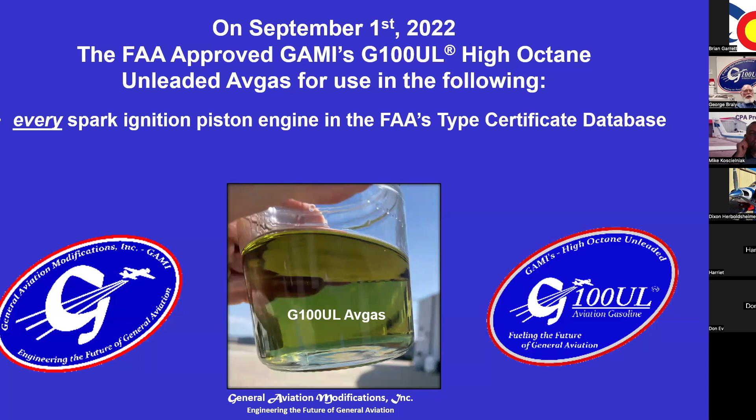On September 1st, 2022 - now nearly 4 years ago - the FAA approved GAMI's G100UL high octane unleaded avgas for use in every spark ignition piston engine in the FAA's type certificate database. And when I say every, I mean every single one of them, without any exceptions. Our instructions from the aircraft certification office are, if we happen to stumble on an oddball that got overlooked for some reason, that as a DER, I'm authorized to sign an 8110-3 and do a 337 to get it approved on a one-off basis. So every single spark ignition piston engine in the FAA's type certificate database, and in addition, every airplane in the type certificate database that uses any of those approved engines. That sounds an awful lot like a fleet approval.

We can discuss that a little later.

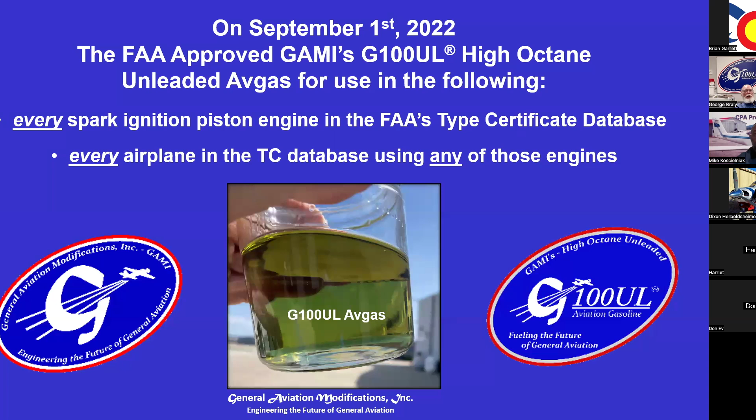The fuel is a drop-in fuel in all of those airplanes and engines. All you have to have is the STC, and you can have an airplane that's half full of 100 low lead, and you can go out there and dump this fuel in on top of it, and it's still legal to fly. The FBO can have a 10,000 gallon tank, burn it down to 1,500 or 2,000 gallons, and put in an order for the green stuff. And 3 or 4 days later, when the transport truck shows up with 7,500 gallons, what does he do with it? He does not have to clean the FBO tank. It's really simple - all he has to do is dump that 100 low lead in on top of this stuff.

I'd dump the G100UL in on top of the remaining 100 low lead, and change the logo on the tank so it says G100UL. That's all that has to be done. Does it have a little 100 low lead in it? Yes. Is it very little? Very little. By the time you've done that cycle 2 or 3 times, the amount of lead that's left is undetectable on standard testing.

And it greatly simplifies the transition and makes it really easy. That's important for Centennial and some of these other airports. Don't let somebody tell you we have to have new tanks or any of that kind of stuff. You don't - you can dump this stuff in on top of them.

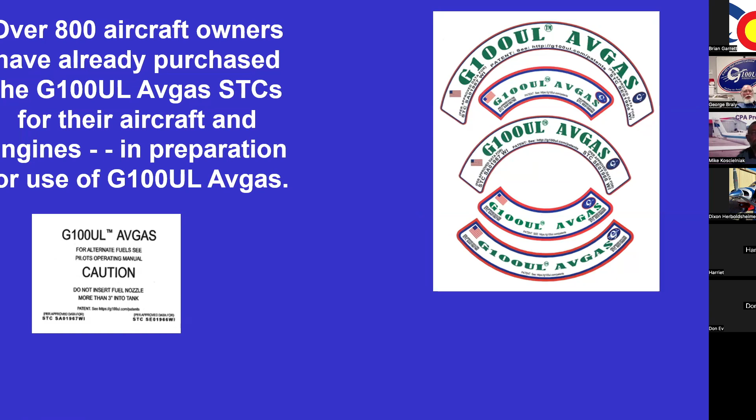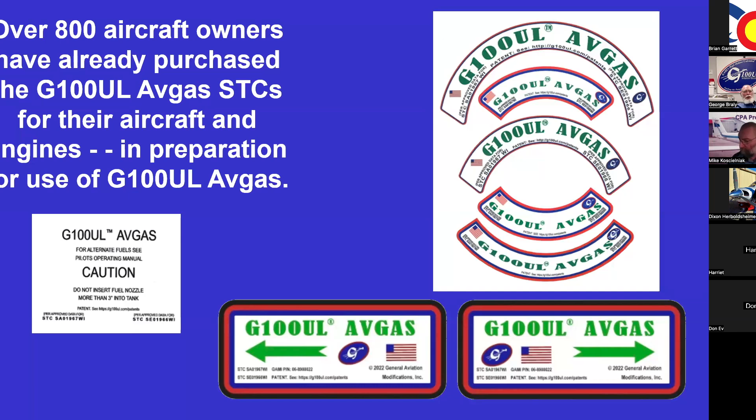Here's a simpler one that may be more useful for some people, and it's very similar to some of the ones presently in use. And then these were recently added to the array of placards because they're useful - you can take one and put it either inboard or outboard of the fuel filler port without having to match the diameter of the port, with the arrow pointing toward the filler, and it'll get the attention of the ground crew.

It has flown a few times. The crew doing the restoration on Saturdays kept hearing our engine run in the test cell, and they got curious and came up and got fascinated watching the computer screens with the different fuels we were running in our test stand over the last 6 months. A few weeks ago they came back to us and said, hey, we're getting ready to fly this airplane again - we want to drain the right-hand tank and put G100UL in and fly this airplane on your fuel.

Now those engines are R2800s, supercharged R2800s. In terms of detonation characteristics, they're potentially the most significantly severe engine that's ever been put on an airplane - a certified airplane or a certified military airplane.

So the fuel is in the airplane, and they're waiting - they lost their pilot and they're waiting on another pilot to show up to fly it. That's shortly underway. They've been running the engine on the field, doing ground runs and whatnot.

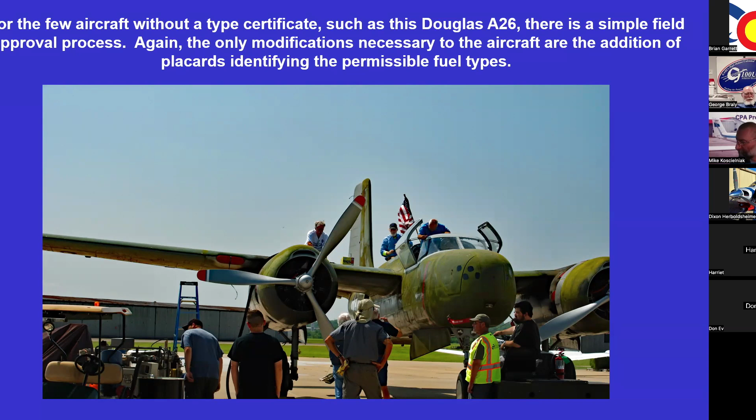If you'll notice the mid-wing construction and the engines hanging out on the wings like that, it's very similar to a much later designed airplane, which has a mid-wing and an engine on each wing, otherwise known as an Aerostar. The family resemblance goes back to the guy who designed this airplane, Ted Smith. He designed the entire line of Aero Commanders, then retired, moved back to California, and designed the Aerostar. I had the pleasure of working for Ted Smith as a junior engineer for three summers between my semesters at Brown University, so this airplane has a little nostalgia in it for me. Right now it's sitting there with 400 gallons of G100UL in the right-hand wing, waiting for a pilot to go fly.

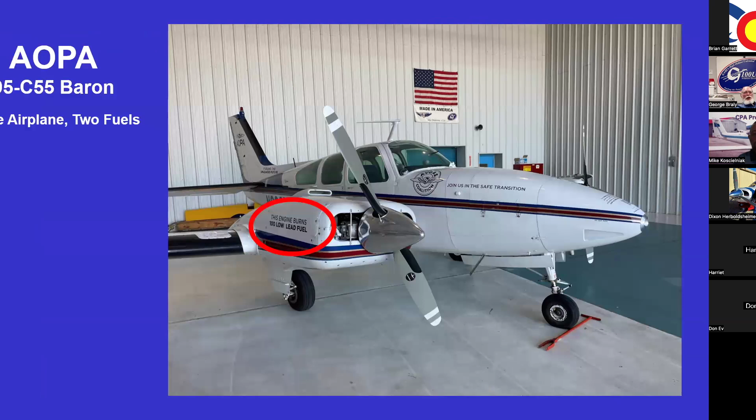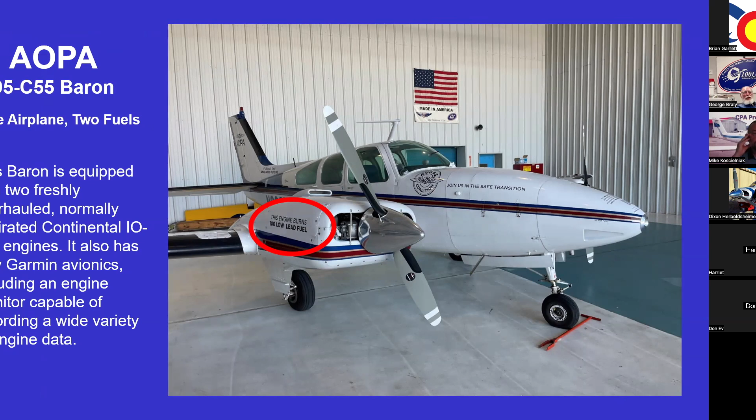So here was the AOPA Baron when it came to our hangar. The right wing had 100 low lead in it. It's equipped with 2 freshly overhauled, normally aspirated 520s. The only time on the engines was 3 or 4 hours return-to-service time in Frederick, Maryland, plus the ferry time out to Ada. Since then, the left-hand engine has had G100UL in it almost 100% of the time, and is now well past 200 hours time in service since last November. We've got a lot of very, very good data.

That is high quality data because you've got two identical engines, randomly selected to put the fuel in the left side or the right side. They've been operated by the same pilots - at least 8 or 10 different pilots have operated this airplane.

You may have seen some of the reports. I think Rick Durden came down and wrote a report on it. AOPA has written several reports. We've also been doing oil changes, sampling the oil, doing bore scope inspections, compression checks, and all that stuff.

So Mark Baker said - let's see here, I'm going to have to move this - Mark Baker says, Braly and GAMI have done a great deal of pioneering work preparing for the GA future, and they staged the AOPA Baron at our headquarters to try out the fuel. The move to unleaded fuels is absolutely critical to the future of general aviation, and this airplane is a valuable tool because it can help us make the transition confidently.

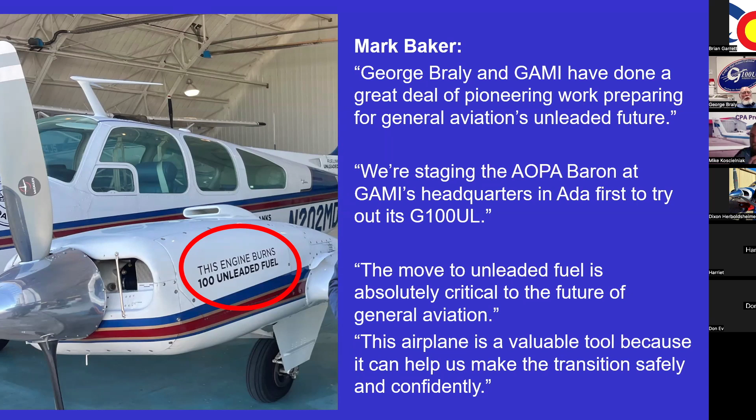And boy, he has been right about that. I will tell you I cannot say enough good about Mark Baker's perception and identification of issues for the future, and his leadership at AOPA that he has put into making this happen.

And there's the good Mr. Baker, and we're both grinning from ear to ear. He just got through, I think, flying the airplane on the fuel, and he was tickled pink with what he saw. A few weeks later, we went out to Buckeye, Arizona, and AOPA brought their plane out there.

We shipped some fuel out there. Interestingly, this airplane is the training Baron from California Aeronautical University in Bakersfield. The owner of the flight school flew it down there. We put the STCs on the airplane on the ramp with a flight standards inspector observing, and he got all through and said, boy, that paperwork, those placards, that's just perfect. Y'all have a good day, go fly. And we did.

The picture in the lower left is from inside our engine test cell here at GAMI, inside the Carl Goulet Memorial Engine Test Facility.

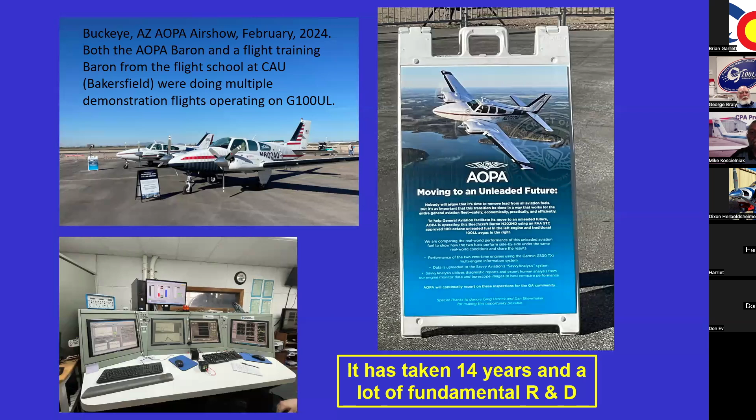It took 14 years and a lot of very fundamental research and development. Don't let somebody mislead you about that statement - that is not hyperbole. All the way back in 2010 and 2011, we started noticing problems with the way detonation testing was being conducted, and we started an intensive R&D effort that took us close to 24 months. But we figured out what everybody else had been doing wrong. The FAA ended up doing a full-blown issue paper, which is their highest level of approval of means and methods of compliance. As far as I know, we have the one and only detonation test methodology that has ever been approved by the highest level of the FAA certification and review process for approving means and methods of doing detonation testing. So that was part of the fundamental R&D picture.

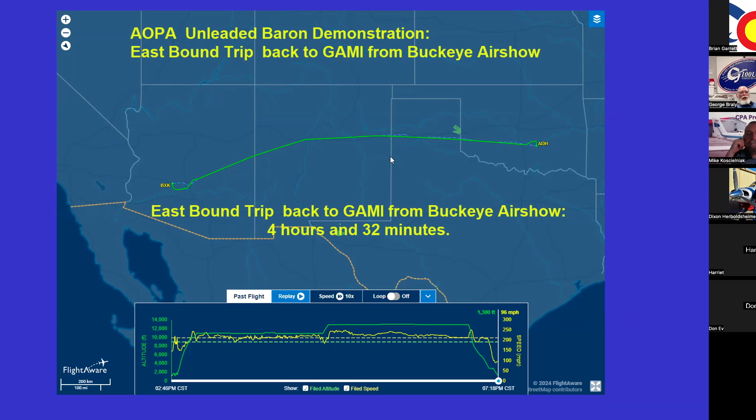There's the flight aware tracked on the trip home in 4 hours and 32 minutes. Nice trip, fun trip. So here's some interesting data from that Baron.

The screenshot on the left, we were cross feeding: the left engine was running off fuel in the right tank, and the right engine was running off fuel in the right tank. So they're both running on 100 low lead. If you look carefully, they're both at 25.4, 25.3 inches. You look over this one, and they're exactly the same, 25.4, 25.3. Look at the RPM: 2470, 2470, 2480, 2470. So the engine is set up in both of these pictures exactly the same.

We're in nice, smooth, still air. This engine's running at 14.5 gallons on each engine, lean of peak, using 100 low lead. And the true airspeed, if you look closely, is 187 knots.

Now, again, with the engine leaned to the same degree, or lean of peak minus about 3%, we now have 14.0 gallons an hour. And this airplane is doing 187 knots exactly. But the fuel flow, that is a misstatement right there.

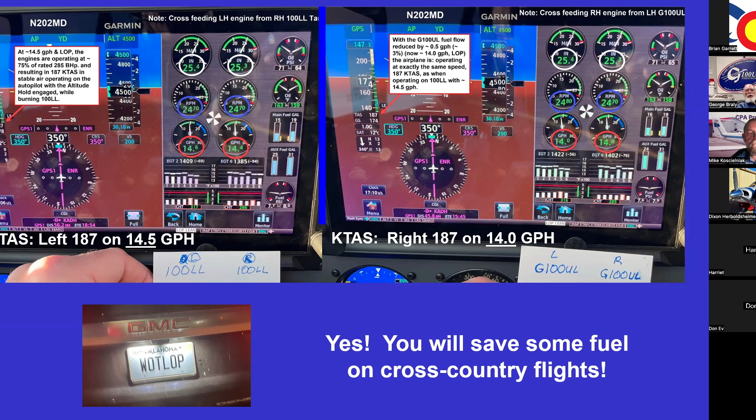How often do they get cleaned? The Commemorative Air Force tells me they clean the plugs in these big radials running 100 low lead approximately every 50 hours. And they have to, because the engines are run fairly rich and the spark plugs end up giving them all kinds of engine problems if they don't clean them prophylactically every 50 hours.

So keep that in mind as you look at this. Oh, by the way, how many man hours does it take to remove and replace the cowling on that A-26? I watched him do it one day. It took 3 men - actually 2 men and 1 woman - about 4 hours to remove the cowling, so they could then start in and remove the 36 spark plugs.

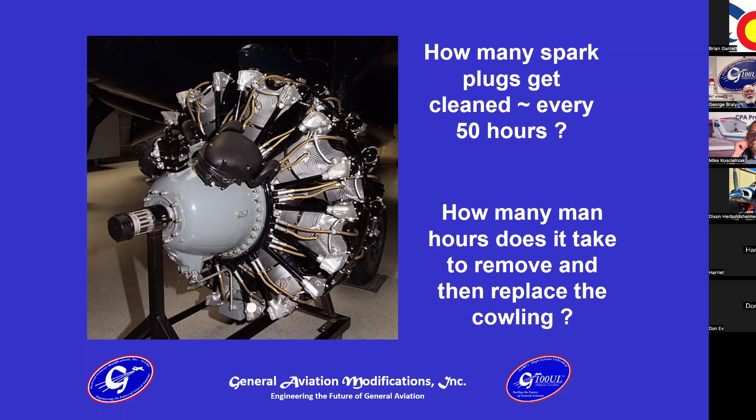And the CAF is now undertaking a program to authorize every single one of the 220 airplanes in the CAF fleet to operate on G100UL.

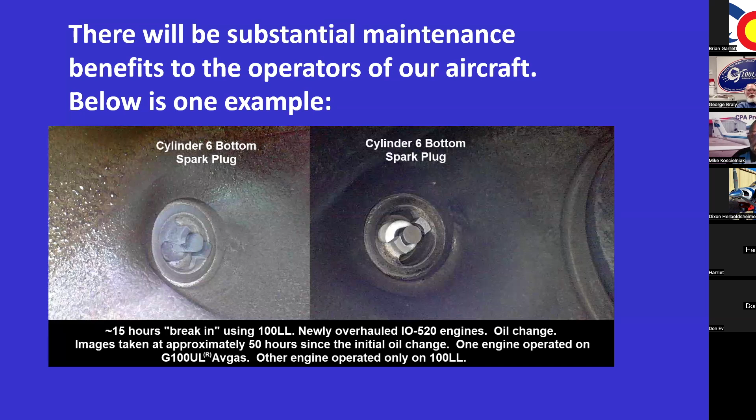This is after about 150 hours. I've looked at the data since then at 200 hours and it hadn't changed. What you see is that the wear metals for iron, chrome, copper and molybdenum are all down, and the wear metals for nickel are exactly the same. On average, they're down about 40%.

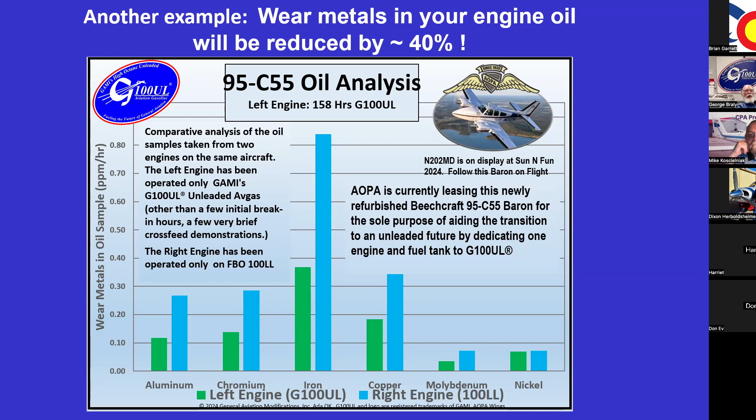Now that has some substantial implications for the future, because it's quite likely for airplanes that are consistently run on G100UL that we're going to get pretty much of an automatic TBO extension out of the FAA based on this data. We've already had those conversations, and they're asking us to collect a little more data and write them a report.

There's been a lot of noise and talk about the valve seat recession at the University of North Dakota running on 94 UL. Here's kind of how those things are measured. It has to be done very carefully to get it accurate, and it takes an actual fixture that has to be custom machined for each different type of cylinder head in order to get repeatable measurements.

The measurements we have done on the AOPA Baron have been done that way, and there's no detectable difference in the valve seat recession after a couple hundred hours between the left engine and the right engine. That is consistent with lots of research data from the FAA from 1989 and 1990, when they ran two identical engines, one on 100 low lead and one on 100 octane isooctane for 150 hours and tore the engines down. They got exactly the same results, no difference.

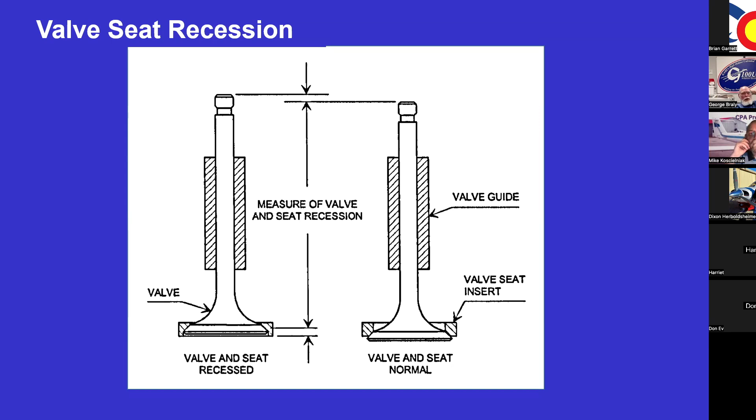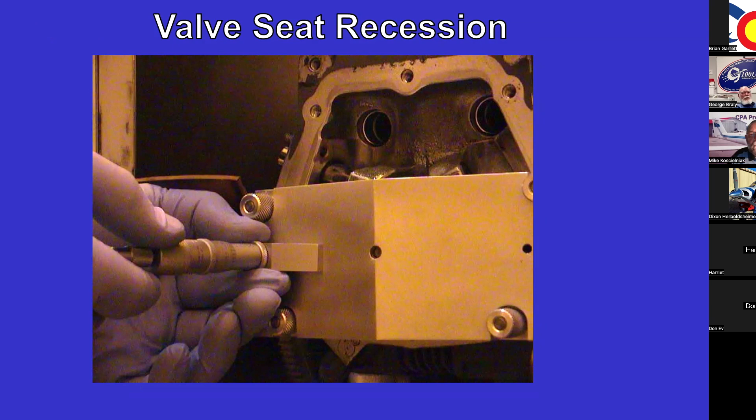So you ask your question, well how do they have this problem at UND, the University of North Dakota, after 300 or 400 hours on one or more of their airplanes out there? This is the fixture that has to be machined and fitted on the cylinder head in order to accurately measure the valve seat recession. And here is some of the data from the AOPA Baron at 150 hours.

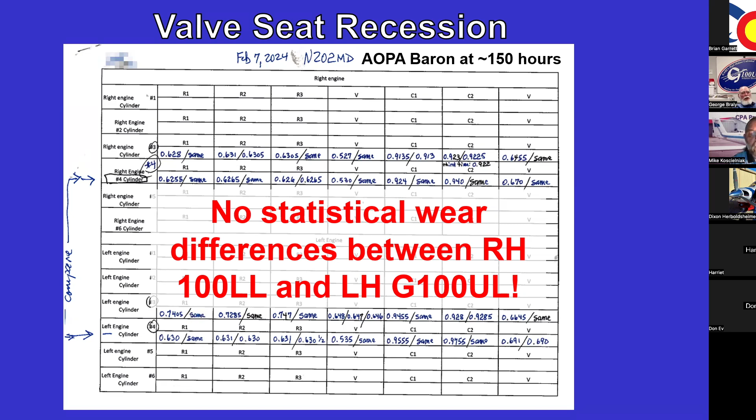And there's no statistical wear difference between the right hand 100 low lead and the left hand G100UL. So moving forward...

G100UL gas, Vitol Aviation, you can look them up. They're the largest independent petroleum distributor in the world. They distribute jet fuel, they used to produce 100 low lead in Europe. They're an international company, they're a little bitty tiny outfit - I think if you go to the internet, their gross sales last year were a measly $550 billion.

They are a worthy first producer, and one of their senior executives is an active general aviation pilot, owns his own airplane. He got interested and took the bull by the horns and went through the company and said, we're going to do this, we're going to lead this program. And they have - they spent 6 or 8 months doing their due diligence.

And then they hauled off and did the following: as of April 10th, 2024, Vitol has made G100UL commercially available. And as a matter of fact, right now there's 1,200,000 gallons of fully conformed, FAA conforming and commercially available G100UL gas in one of these tanks. And as I inquired exactly, it's in that tank right there.

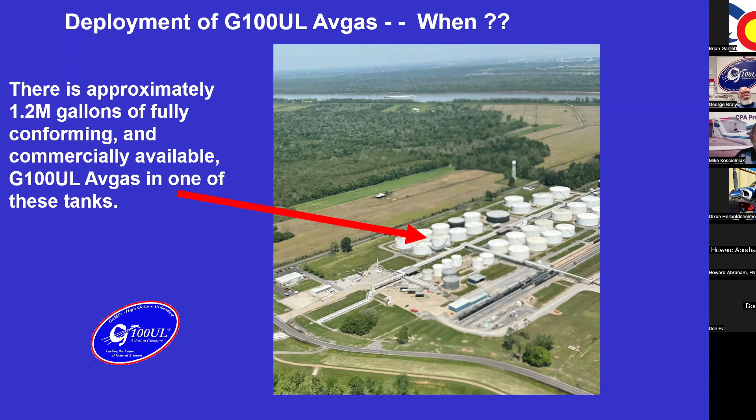So I want to share this little clip with you. About 3 weeks ago, Martin Pauly, who does the YouTube videos on airplane stuff, was here to do one on G100UL, which he is going to release I believe on Friday night. While he was here, we happened out on the ramp, and Doug Rosendahl showed up with his rocket, and he wanted to reload on fuel. He'd been here several times running G100UL in his rocket.

So I want to play this. It's less than 2 minutes, but it's really informative stuff. And it's not me talking to you - it's somebody else that's got more airplane experience than I do.

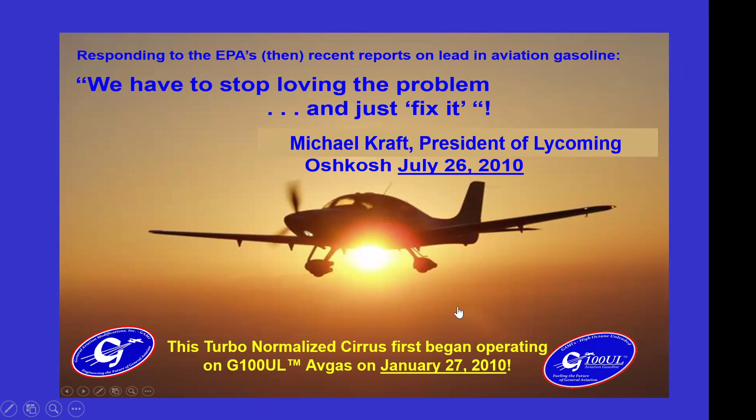So we're coming to the end of this. This photograph, this Cirrus, was taken on January 27th, 2010. That was the first time a real airplane flew on G100UL gas, and I happened to catch it in formation with another airplane and got this spectacular photograph. The question at the time, 14 years ago, was: is that a rising sun or a setting sun? Based on what we saw with the Baron turning into the sun at the beginning, I think it was in fact a rising sun for general aviation.

Questions, anybody? So we've got a few that came in via chat. I don't know if we want to do those first, or whatever you want to do. Okay, we didn't capture the audio on the video you tried to share, so perhaps we can all go to YouTube and look at that video if you can share the link. Yeah, let me see.